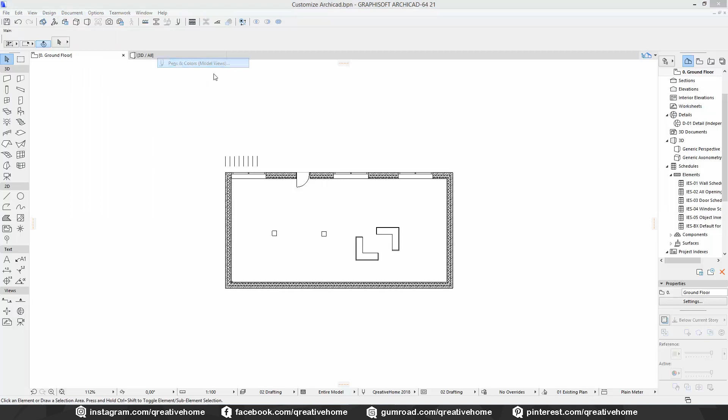You will find the combinations down here in the quick options toolbar, or you can go to Document, Pen Sets, Pens and Colors. Here you can see all available pen sets. If you want to edit a pen set, watch the very first video of this series. But now we just want to switch between different pen sets.

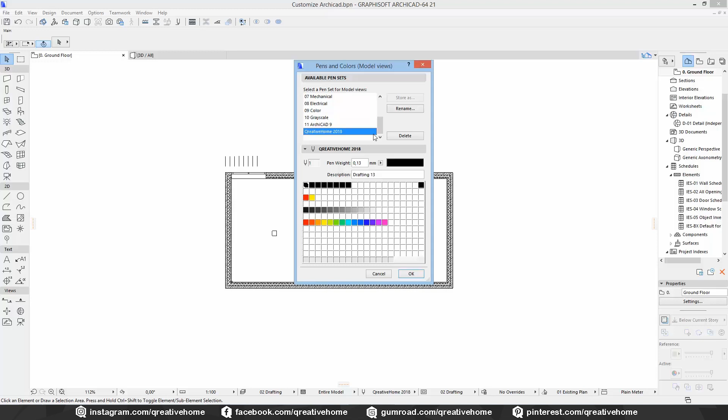But why should we do that? I've chosen one practical example to show you what it could be good for: the typical AutoCAD pen setting. If you do not work with true line weight, you don't really see how thick the lines in your drawings are. In this case, it could be useful to display your different line weights in different colors.

Let's take a look at these lines here. These are all the different black lines of my original pen set: 0.13, 0.18, 0.25, 0.35, 0.50, 0.80, 1mm and 2mm. What I want to achieve is for every different type to be displayed in a specific color, but without the true line weight.

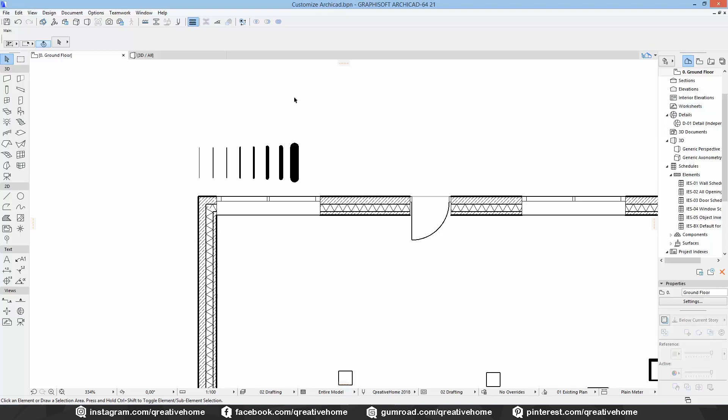To do that, I just need to know the positions of the pens in my pen set. In this case it's very simple, it's 1 to 8 - you can see the number of the position here. So we need a new pen set with colors on the same positions.

You can see there is no new button on top. To create a new pen set, you just start changing anything inside an existing pen set and it automatically will be named custom. But the original one is still there, so don't hesitate to make changes.

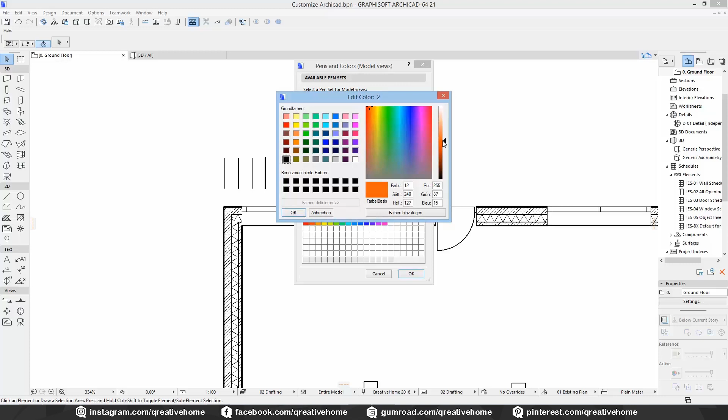I choose a light orange maybe as my thinnest line and go over to a dark blue as my thickest line, and I try to choose darker colors for thicker lines because it's just logical.

Now that we're finished, it's very important to save the new pen set before closing the window. Click on Store As and give it a new name, or you can also overwrite existing pen sets here.

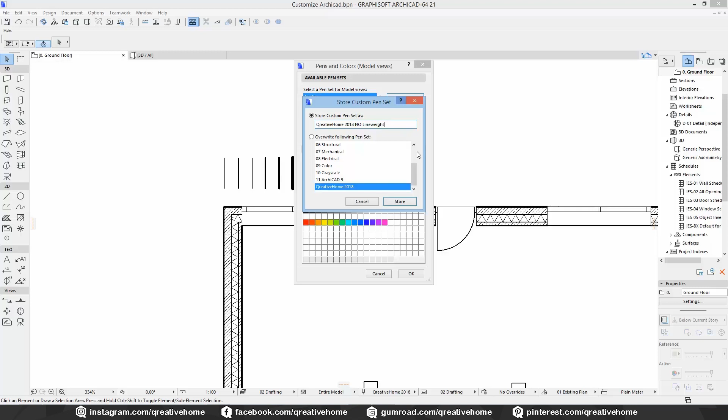Now you can clearly see the different colors, and I could go work on knowing which line I used. That's just an example. You could also assign different colors to different building parts, so you can easily see which edge refers to which part in the ground plan or floor plan. Maybe you have a slab in red and walls in green or something, and you always know the line refers to this and that building part.

That's just another example, but think for yourselves - you will find some logical way to use different pen sets.